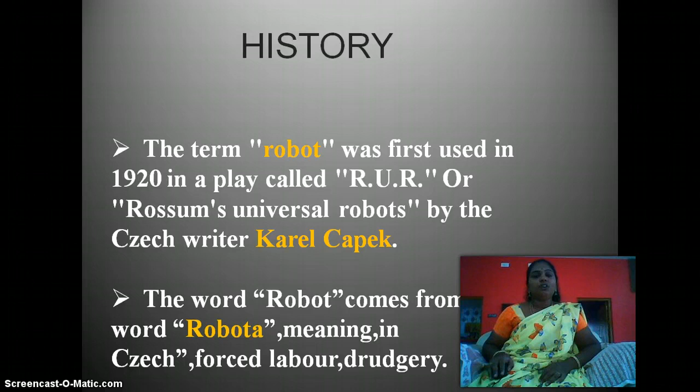to the robo world. And history: the term robot was first used in 1920 in a play called Rossum's Universal Robots by the Czech writer Karel Čapek. The word robot comes from the word robota, which means forced labor in Czech.

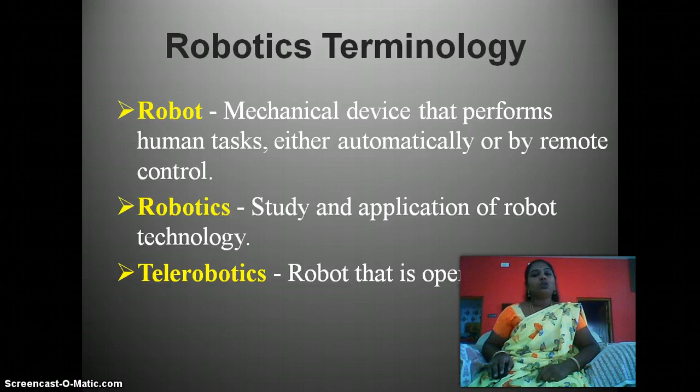So what are the terminologies in robotics? Robot: it is a mechanical device that performs human tasks either automatically or by remote control. Robotics: it is the study and application of robot technology. And telerobotics: robots that can be operated remotely, which is called telerobotics.

The next one is the definition of a robot. It is a reprogrammable multifunctional manipulator designed to move material, parts, tools or specialized devices through various programmed motions for the performance of a variety of tasks, and it is defined by the Robot Institute of America.

So for example, in our robotics laboratory, we have a pick and place robot. The pick and place robot is a reprogrammable robot and it is multifunctional also. What it does is it picks the chess coin, and it can move and do many playing tasks, and it will finally place it somewhere.

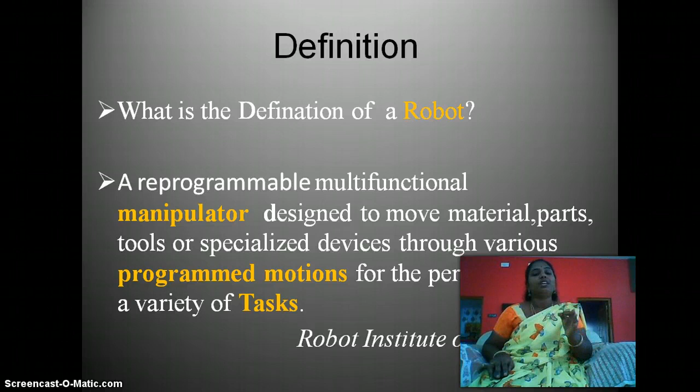So in car companies, they have to move the cars. We are using a conveyor. The conveyor is likewise a robot's arm, and specialized devices through various programmed motions for the performance of a variety of tasks, which is called a robot.

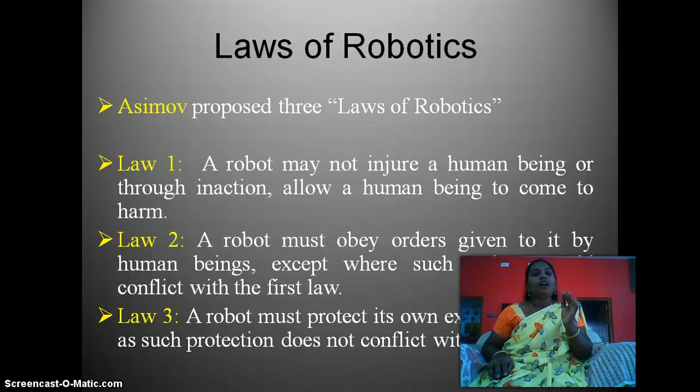So there are three laws of robotics: law 1, law 2 and law 3. Law 1 says it should not injure any human being, law 2 says it should obey orders given by human beings, and law 3 says a robot must protect its own existence.

And the next one is the robot control loop. The robot control loop is also a control loop for humans. What is the first thing? Sense. If fire touches your skin, what will you do? You will sense. Then think: oh, fire is touching me, what will I do? You will take your finger away from the fire. That is your action, act.

Likewise, the robot also should sense, think and act. For sense, it needs sensors. For think, it needs some artificial intelligence programming. And to act, it needs motion, speech, text, visuals, wheels likewise. The sensors used are speech sensor, vision sensor, acceleration sensor, temperature, position, magnetic field, light sensor, sound sensor, etc.

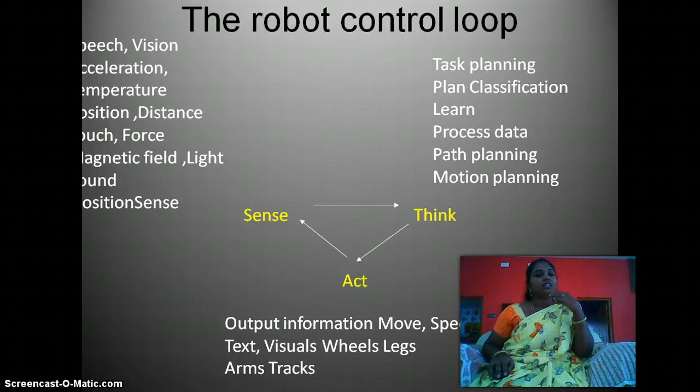And for think, it should do task planning, classification of the planning, then learn, then process data, then path planning, then motion planning. Finally, act. For action, it should move through wheels or anything, it should speak, it should text you, and it should have visuals, legs, arms, tracks, etc.

And types of robots. The first one is the industrial robot. It can be used for handling materials. Welding robot: welding is a tedious process. If humans do the welding process, it is not safe and it will be difficult for the human. So we can use robots there.

And in nuclear power plants for carrying radioactive material etc., we can use these industrial robots. And for inspection, for improving productivity and for laboratory applications, for everything you need industrial robots.

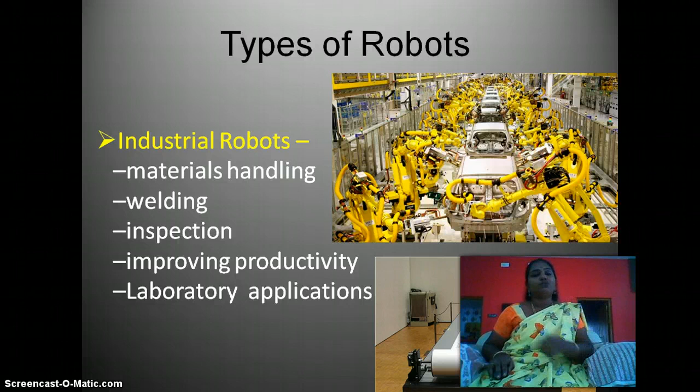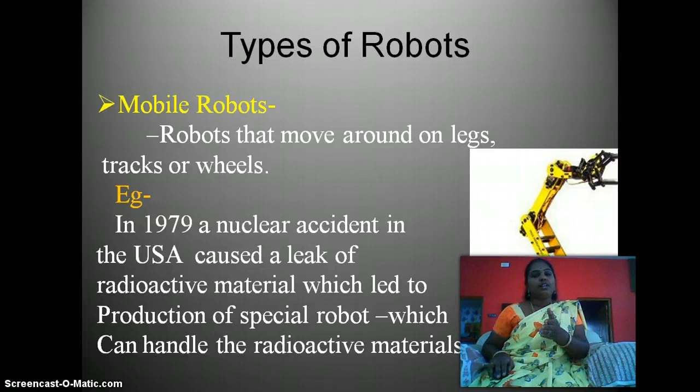And mobile robots: robots that move around on legs, tracks or wheels are called mobile robots. They were developed after a nuclear accident in 1979 in the USA. The radioactive material led to the production of special robots which can handle radioactive materials in nuclear power plants.

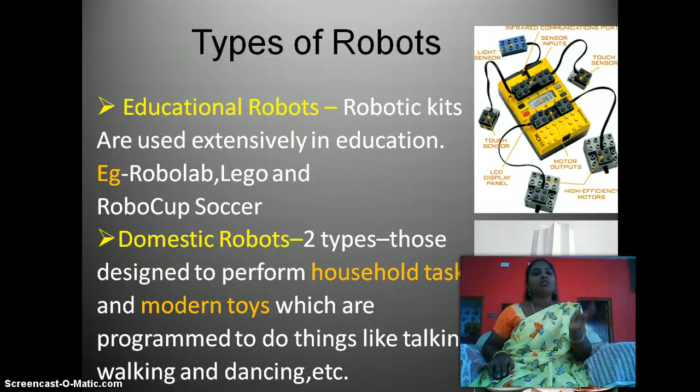Educational robots are robots used extensively in education, for example Robolab, Lego, RoboCup Soccer, where students can play and easily learn robotic concepts. Domestic robots can be used for household tasks and modern toys.

What are robot components? First is the manipulator, which is like human parts having joints. The main body of the robot has links, joints, and other structural elements. Next is the end effector. If you want to drink a glass of water, you use your hand. Likewise, the end effector is the part of the robot used for such tasks.

Actuators are the muscles of the manipulator, which are servo motors, stepper motors, pneumatic and hydraulic cylinders. Finally, sensors are used for collection of information, since the robot has to sense things, collecting information about its internal state and communicating with the outside environment, such as temperature, sounds, or something coming from behind. Robots need sensors.

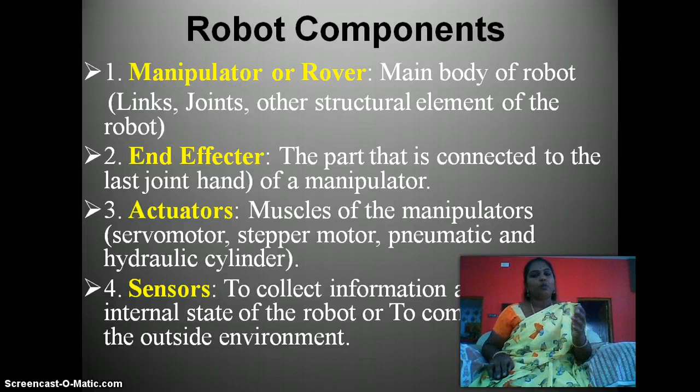Other robot components are controller, processor, and software. The controller is used as a cerebellum, controlling and coordinating the motion of the actuators. The processor is the brain of the robot, as every computer needs one. Software is an operating system which organizes everything in the robot.

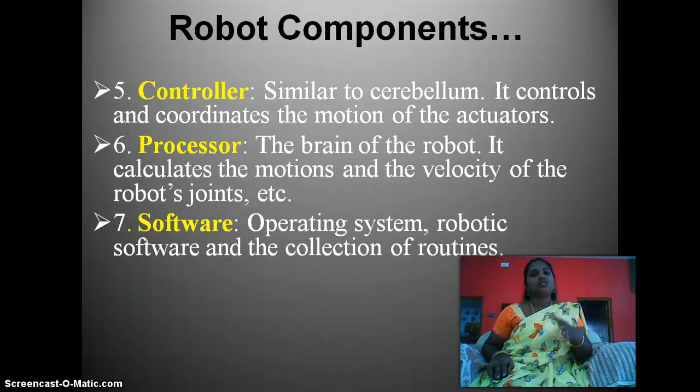Next, sensors. What types of sensors are available? Sensors are used for sensing things and are the core of the robot; they are the system that alerts the robot. There are light sensors, sound sensors, heat sensors, chemical sensors, force sensors, object proximity sensors, physical orientation and position sensors, magnetic sensors, and resistance sensors. So many sensors are there.

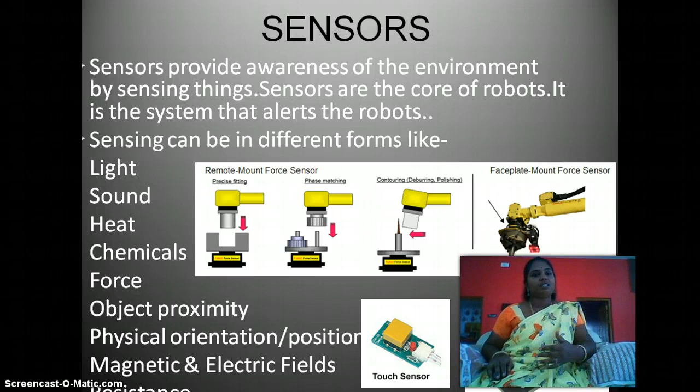For example, if a robot is moving and an object is in front of it, the proximity sensor immediately senses it, so the robot can move apart from the obstacle.

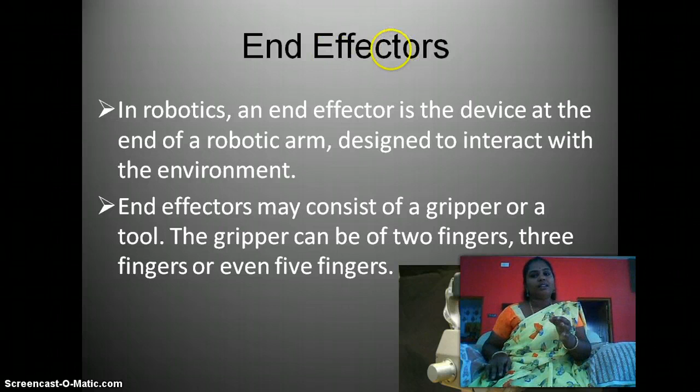End effectors: an end effector is a device at the end of a robotic arm, designed to interact with the environment. It may consist of a gripper or a tool. Next are actuators, which may be for locomotion or manipulation.

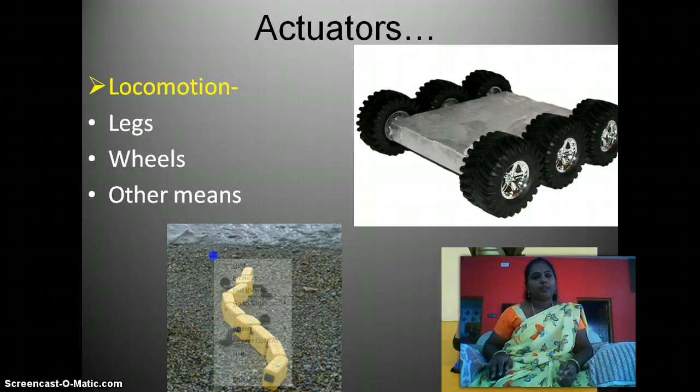Manipulation means degrees of freedom; it should have arms and grippers. Degrees of freedom include rotating the base of the arm, pivoting the base of the arm, bending the elbow, wrist up and down, wrist left and right, and rotating the wrist. Likewise, it can have manual control.

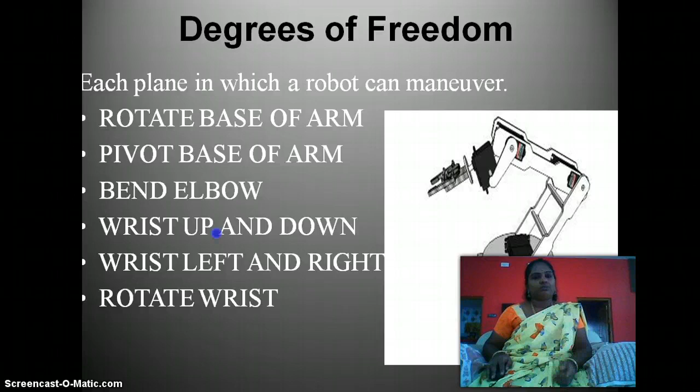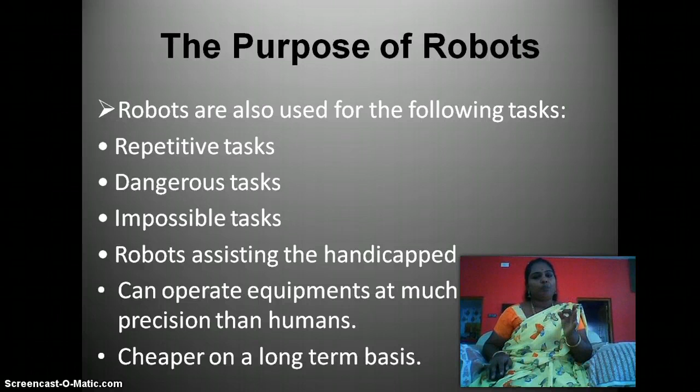The purpose of robots includes performing repetitive tasks, dangerous tasks, and impossible tasks, as well as assisting the handicapped. They can operate equipment at much higher precision than humans, and are cheaper on a long-term basis.

Applications include exploration such as space missions, robots in the Antarctic, exploring volcanoes, and underwater exploration. Where humans cannot go, or where going would risk human lives, we can use robotics instead, such as in space missions, Antarctic exploration, volcanoes, and underwater exploration.

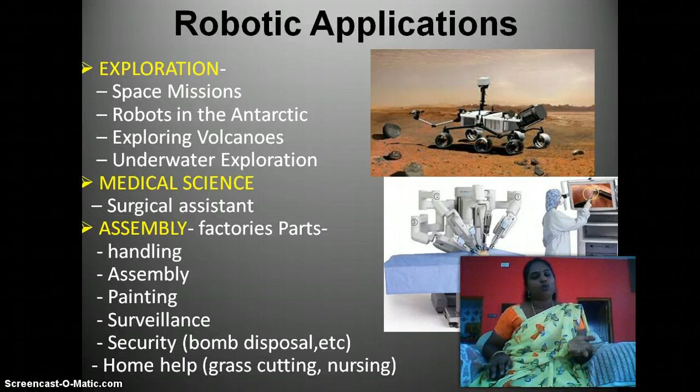In medical sciences, robots are used as surgical assistants, and in the future they may perform surgery themselves. Other applications include assembly of factory parts, handling, painting, surveillance and security such as bomb disposal, and home help.